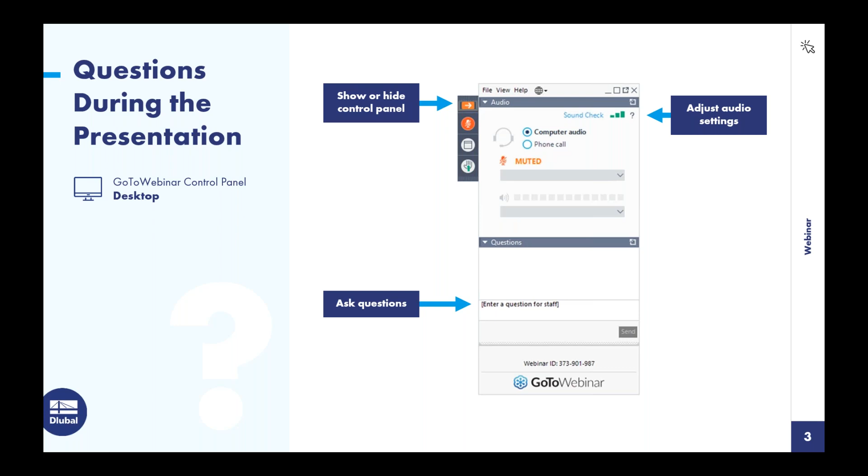So to quickly go over the content that we'll cover over the next hour today, I do want to give a brief introduction to the RFEM 6 program and the available add-ons for mass timber design. We'll then move on to our first example, which will be shown over here on the right-hand side, of a CLT floor, where we'll take a look at the gravity-only analysis and design. We'll talk about the modeling and loading workflow, the design according to the CSA, including the ultimate and serviceability limit state, but recently released is also the fire limit state. And at the end of this example, we'll quickly take a look at the modal analysis to determine the natural frequencies and vibrations of our timber floor.

We'll then move on to our second example. This is going to be a CLT hybrid multi-story building. This is where we can address both lateral and gravity analysis and design. We'll take advantage of the building model add-on that will release these building specific features within RFEM, including diaphragm, shear walls, and of course we can still carry out the full design of our CLT panels according to the CSA standard.

So for those of you not familiar with our program, RFEM 6 is the base software. So this allows us to fully model our structure. All of the materials, the cross sections from the available standards are included in the base program, not only for Canada, the United States, but also other international standards. We can fully load the structure and we can get an analysis, so internal forces, deflections, and so on.

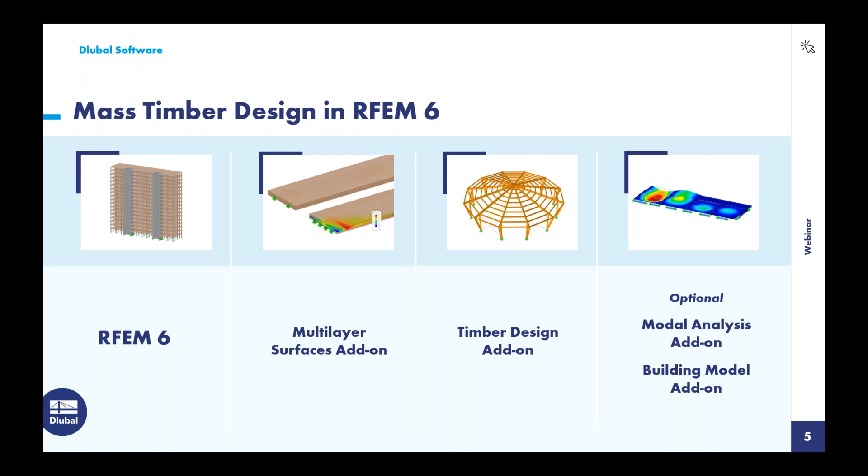So we'll begin in RFEM today. When you begin a new model, the base data dialog box would be available to us. So we would give it a model name. Now for my timber floor, we could technically model this in a 2D environment since we're looking at gravity only, but I will keep this in a 3D environment. Under the second tab for the add-ons, these are the available add-ons within RFEM that you have purchased for your license. And for today's example, we're going to activate here the multi-layer surfaces as well as the timber design add-on.

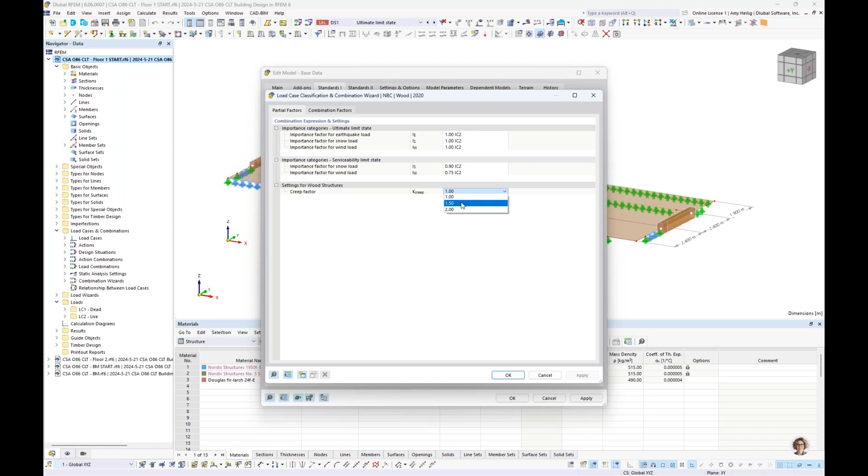And finally, under this third tab, this is where we set our standards. So you'll notice that within this dropdown, I do have the NBC selected that is specific to wood. Now, this is identical to the NBC load combination generator above it. The difference here is that when we activate the timber design add-on, we have the ability to account for the creep factor. I'll show this to you later on in the serviceability load combinations, how we can account for that, but the NBC wood is required when we activate the timber design add-on specifically.

We will carry out the design of the CLT panels according to the CSA O86 2019, but notice we also have the NDS, Eurocode, and other international standards available. I will be working in metric units today, but we can always change this to imperial units. If we access the unit settings here, we can either toggle between metric or imperial.

So I already have the timber floor modeled, but let us run through the workflow that we would typically go through when we are modeling a new CLT panel. So we would start by drawing a 2D surface element. So this would be available up here in our toolbar.

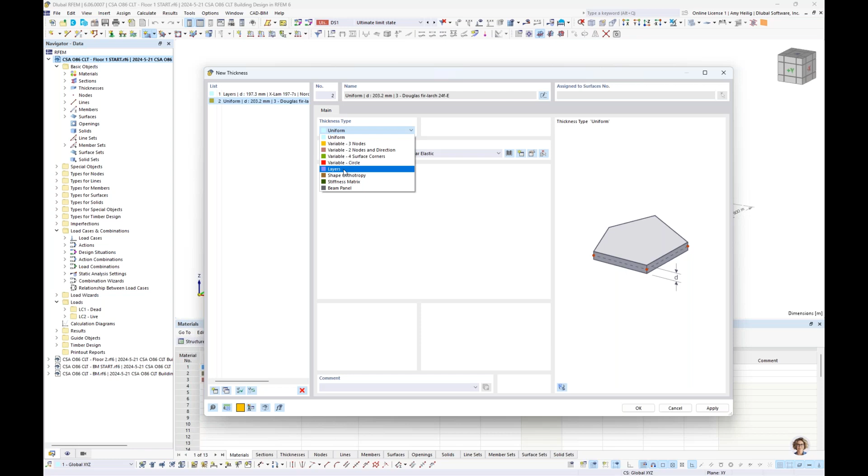And the program is asking us to initially define a thickness. So if I go into my thickness definitions, we would create a new definition type here. You'll notice that the thickness type can be set to layers. So this option is only available because we have activated the multi-layer surfaces add-on. Without this add-on active, we would not see this option available to us.

So under the second tab, this allows me to individually create my layers for my custom CLT layup. To begin, we would want to define here a new material. So we can access our material database with the button up here in the upper right-hand corner. And using our filters on the left, we can filter to Canada, to timber, and then the CSA O86-19. So here are all of the relevant materials with the sub-materials shown over here on the right-hand side. So once we select any arbitrary material for our example today, we click OK.

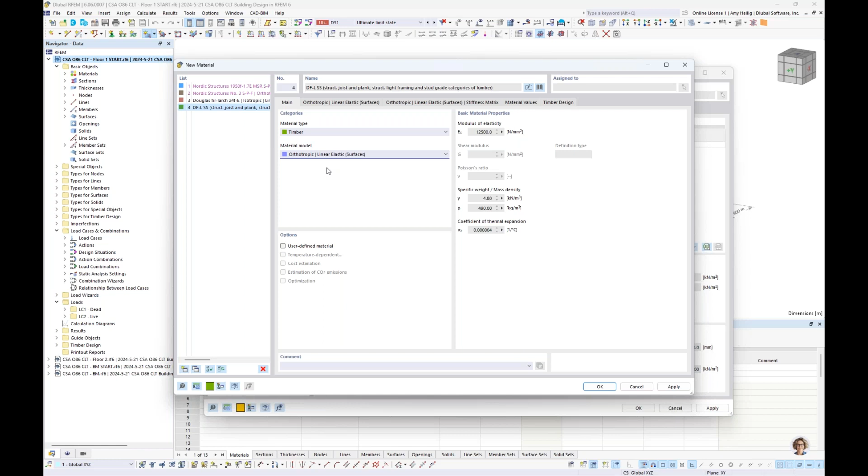Now, it would be quite common as well for CLT, of course, to change the material model to orthotropic. So this would be required because we're using this material for 2D surfaces. Therefore, we need two different strengths in two different directions. So we'll go ahead and toggle that to the orthotropic linear elastic. Now, we would also want to activate here user-defined material. And the reason why is it's also quite common with CLT that we would set the modulus of elasticity in the weak axis direction to 0.

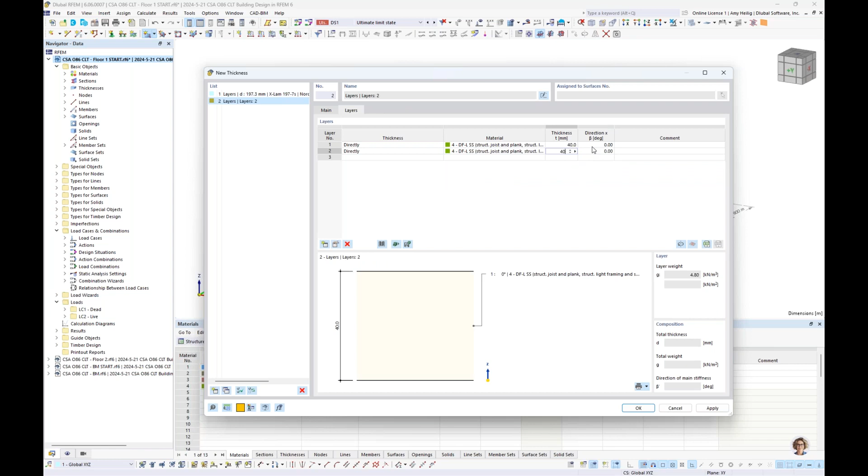So once we have input this information for the material, it will be brought in to the thickness dialog box where we can set the thickness of our first layer to something like 40 millimeters. And the orientation is set to 0 degrees. This is based on the local x-axis of the surface element itself. Now, the second layer, we can just choose this same material. We can set the same thickness. The orientation, though, would be set to 90 degrees. And then for our third layer, we will just use this same material, again, 40 millimeters. And here we have a custom 3-layer CLT layup.

Now, this is the entire concept here of CLT, to ensure that these layers are oriented 90 degrees from the layer above or below it. We can save this to our library so that we can pull open this layup definition for any future RFEM models. Now, alternatively, if we want to take advantage of our manufacturer library, we can do so.

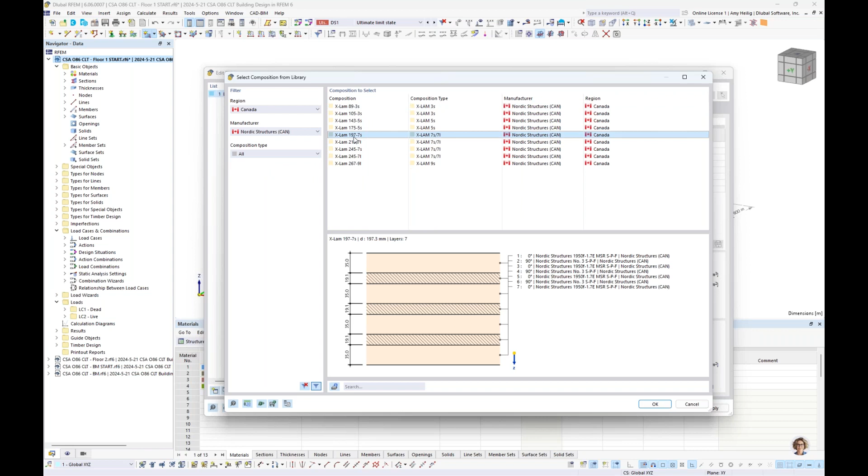So you'll notice here under the import layers from library, and to clear the filters of the regions, we have all of the manufacturers from North America and from Europe implemented directly within RFEM. Filtering to the region of Canada, we have a few manufacturers here, including KLH, Kalesnikoff, and Nordic Structures. So for example, today we'll take advantage of Nordic Structures and we will choose a 7-ply layup. When I click OK, you'll notice that all of these layers are automatically brought in with the relevant thickness and orientation. And this is just information that we were given directly from the manufacturer. So quick access here if you do plan on using one of their products.

Under the third tab, stiffness reduction. So this is a really important topic when it comes to our CLT panels. You'll notice that the K33 reduction factor here is for the torsional stiffness. We also have the K88, which is the in-plane stiffness reduction factor. And these values were already given to us by the manufacturer.

Now, it's quite common for most of these CLT manufacturers to not include glue at the narrow edges here of our boards of each layer. So inevitably, the shear stresses are also not going to be transferred to those narrow sides of the board. So this is the reason why we typically would want to apply these reduction factors to our panel. Now, when we reference the CSA or the NDS, there really is no guidance on how to calculate these stiffness modification factors. So therefore, we actually refer to the EC5 and in particular the Austrian Annex, which has very clear equations on what these reduction factors should be when we do not have glue at the narrow edges.

So I'll actually turn to our website here, dlubal.com, and we have a frequently asked question. It's FAQ 4119 that discusses this topic further and exactly how to calculate the k33 and k88 reduction factor here from the EC5 standard. We also have the Excel file you can directly download from the FAQ here.

And if I pull open this Excel file, it's fairly straightforward in that we would just input some properties here of our CLT panel, and then those equations from the Austrian annex are already listed here to calculate what those reduction factors will be exactly. So again, going back to RFEM, when you are taking advantage of the manufacturer CLT products, these values have already been set and given to us from the manufacturer directly, but if you are creating a custom CLT layup, this is likely something that you're going to want to input yourself.

Now, k44 and k55, these are going to be the shear stiffness reduction factors. When we take a look at the CSA O86 or the Canadian CLT handbook for deflection calculations, these all utilize the shear analogy method to calculate the reduced bending and shear stiffness to account for shear deformation. Well, RFEM is actually utilizing what we call the laminate theory, and it's going to directly calculate the shear stiffness matrix entries D44 and D55, considering both shear and bending deformation.

So the laminate theory is certainly a more detailed and exact approach when we compare it to the analytical equations from the shear analogy method. But point being that that reduction is all taking place underneath the hood with the laminate theory calculations, so we likely are not going to adjust these factors.

Then we have our settings down here where we can activate this checkbox for design for failure of net section and failure in glued contact surface. So we might be wondering, well, what is this related to? So I'll go back to the PowerPoint here to explain this in more detail. This all has to do with the shear failure modes that we're going to present to you within the CLT design according to the CSA standard.

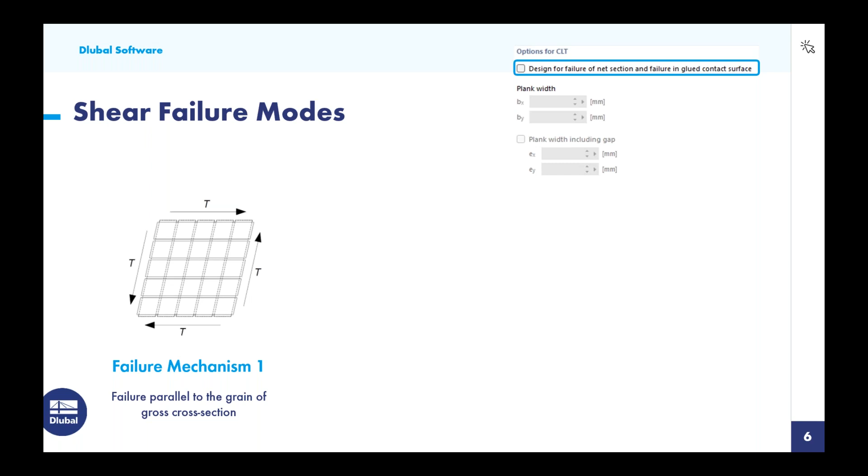Now, when we turn on this option, we're going to carry out 2 additional checks, including failure mechanism 2, which is failure perpendicular to the grain of the net cross section. This is also known in the handbook as the net shear failure. And finally, we also have failure mechanism 3. This is the failure of orthogonally crossing boards, otherwise known as torsion.

So we might apply these additional shear checks when we have a CLT panel that's acting more like a beam, or certainly for wall elements. So you'd want to refer to the handbook to decide if that's something that you would like to activate for those additional checks of the CLT panel. The plank width would also be defined when we turn on this option, as well as a plank width including any gaps if those were available. This information would be needed then to carry out these additional shear checks. For today's example, I'm going to leave this unchecked, so we should only see failure mechanism 1 in our results.

The final tab here is going to be the stiffness matrix. So this is the entire concept of these multi-layer surfaces, that we are calculating this global stiffness matrix automatically for you based on the individual layers, and we can actually view the stiffness matrix here. I'll discuss this in more detail later on when we're running our calculation.

So once this information is input, we would draw our CLT panels. And you'll notice that, again, I've taken the liberty here to model 3 panels side by side for our timber floor. Now, it's really important, in the same way that we orient members with a strong and a weak axis, that we do the exact same thing for these timber panels. So CLT panels also have a strong and a weak axis, and we want to ensure that we are modeling them correctly as well.

So under our navigator and the views tab, up at the top, we have our surfaces tree, where we can activate here the display of the layer directions. And I'll turn this into wireframe view and zoom in here. So now you'll notice that layers 1, 3, 5, and 7 for our CLT panel, which is the strong axis direction, are oriented in the lengthwise direction between supports, which is exactly what we'd like to see.

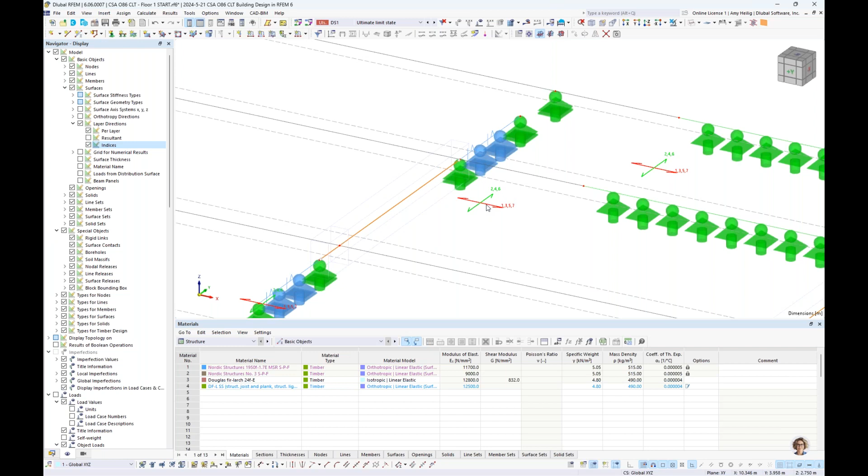And then the weak axis, so layers 2, 4, and 6 are oriented in this transverse direction. Alternatively, we can activate here only the resultant, which is going to show you the strong axis orientation only.

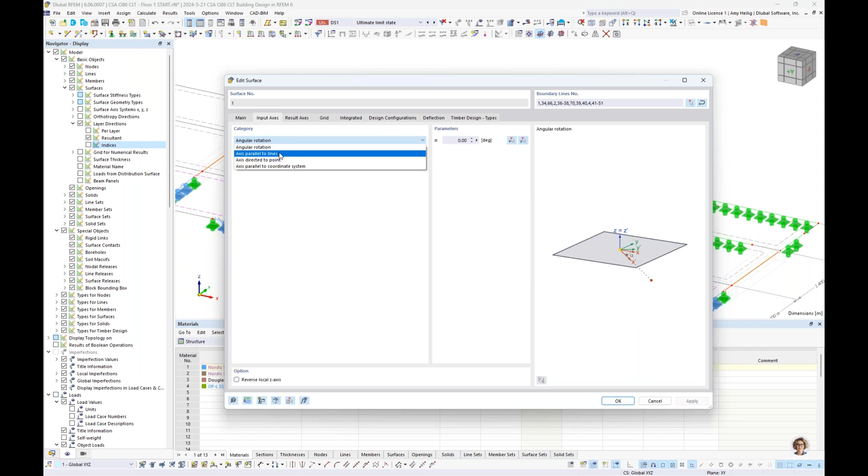If we needed to make modifications to the axis direction, we could double click on a surface or multiple surfaces, activate here specific axes, and under the second tab, we have the ability to rotate the local axes or maybe set them parallel to a line within the model or additional options here.

So I'd also like to go over the additional elements that are modeled here for my timber floor. You'll notice that we do have glulam beams that are going to span between these supports and essentially will inevitably support the CLT panels above them. Now, I did not model an eccentricity here. Everything is modeled at the center line. This is a bit more of a conservative approach with the internal forces rather than modeling this fully rigid eccentricity that may be hard to achieve in true construction methods anyway.

So taking a look at the cross-section definitions quickly, we have our first beam over here, a slightly larger section at 240 by 440 millimeters. And then the rest of the beams are going to be 160 by 320 millimeters. All of these members have a moment release applied at the member ends, as well as a torsional release applied at one end only.

Now, these were modeled as separate segments here. It is entirely possible to keep it as one continuous member, but if they are separate segments, it's really no problem in the program. We can select both of these and create what we call a member set. So that's what this very faint dotted line is around both of these segments. And member sets can be fully designed as one continuous member as well, regardless if the beam is broken up into separate segments. Now, we won't be looking at the member design today, rather our focus is only on the CLT design, but I thought that was worth mentioning.

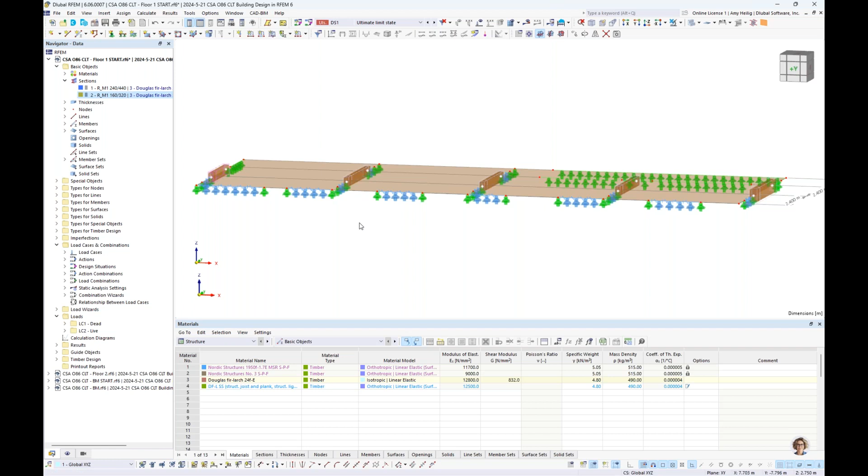You'll also see here several support conditions, and essentially this is a timber floor that is modeled at the elevation 2.75 meters in the vertical direction. So these support conditions are going to represent the columns and the wall elements that are framing up underneath it. But because we're only evaluating and analyzing the specific floor for gravity only, we're representing those by the support conditions shown. So for example, we have pin supports here and over on the right that maybe represent the column framing up into the timber floor directly for point supported CLT.

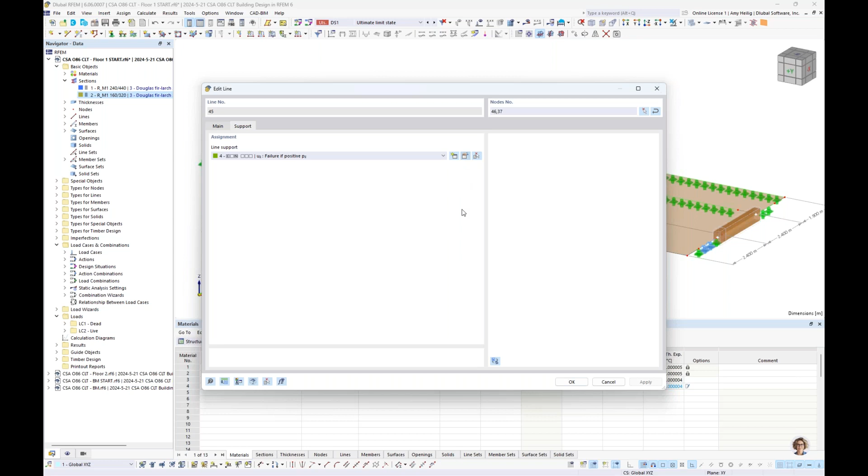Then we also have the pin line supports that are going to represent our concrete shear walls. And then you'll also notice these nonlinear line supports. So the nonlinear line supports are representing our CLT shear walls that maybe exist framing up into this timber floor. So I have set this nonlinearity here so that these two elements will release in tension. When that occurs, we also have the nodal supports modeled at each end of that CLT shear wall. This represents some type of tie or strap to take those tension forces over.

So the modeling overview is complete, but now let us talk about how everything is connecting together. And specifically, we'll start with the timber panel to panel connection here. So as it's shown as default, all of the CLT panel forces and moments are going to be fully transferred to one another. But we know that these panels will likely be connected with screws. So we would like to release something like the moment. Maybe we want to account for the slip of the screw connection.

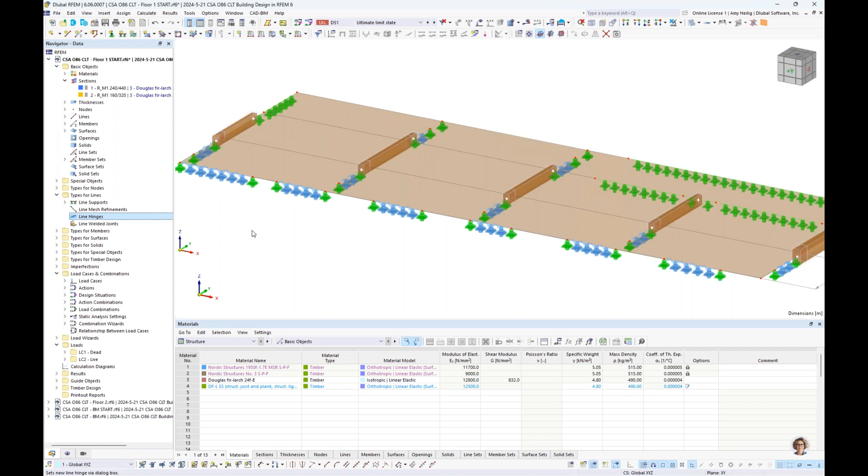Well, we do so with what's called a line hinge. And this is available over here in our navigator. Under the Types for Line folder, we can right-click here under Line Hinge to create a new definition type. And within this dialog box, we can fully release the moment between the two panels.

Now, for my example today, I'm actually going to just set this to a very small value. I get a little bit better stability once we get into the larger 3D model. So it's entirely possible to release it for most scenarios, but in others, you may need to just set a very small spring constant here.

We also can define the slip of the connection, and this is based on the local axes of the line element itself. So in this longitudinal direction, the local x-axis, we can define a spring constant here, and this would be calculated outside of RFEM just depending on the type of screw connection we have.

So using an arbitrary value here of 8,000 kilonewtons per meter squared, we can set this in both the transverse direction, but also the longitudinal direction. So we see both the X and Y axes indicated here in our image, and that's what we're setting this slip over here on the left-hand side.

Now, once we have defined this specific definition type, we would need to actually apply it to the model. So we can do so by initially clicking on our surface, and then my second click is going to be the line elements themselves that I want to apply this line hinge. So when I complete the first surface, we'll go ahead and choose the option over here to add a new object where we select surface number 2, and I'll go ahead and turn this to wireframe view.

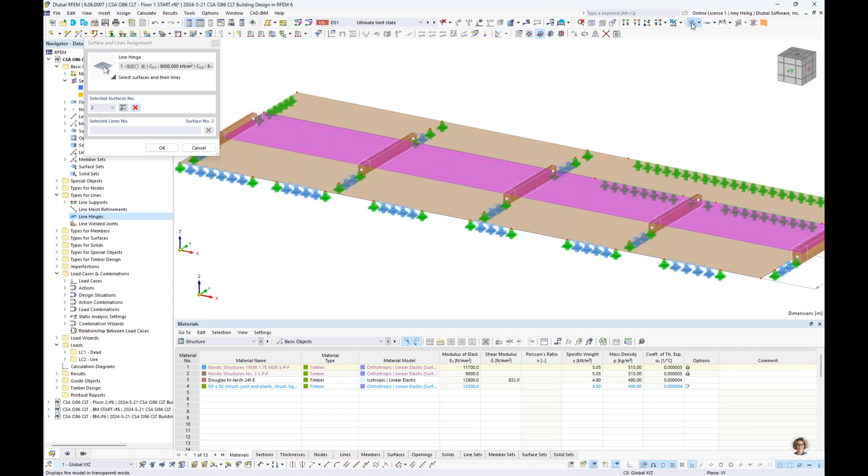And then my second click is going to be these line elements here on the right-hand side of surface number 2 to apply the line hinge. So once this is done, I click OK through these dialog boxes. And what we should see if I turn this into a rendered view is the line hinge symbol.

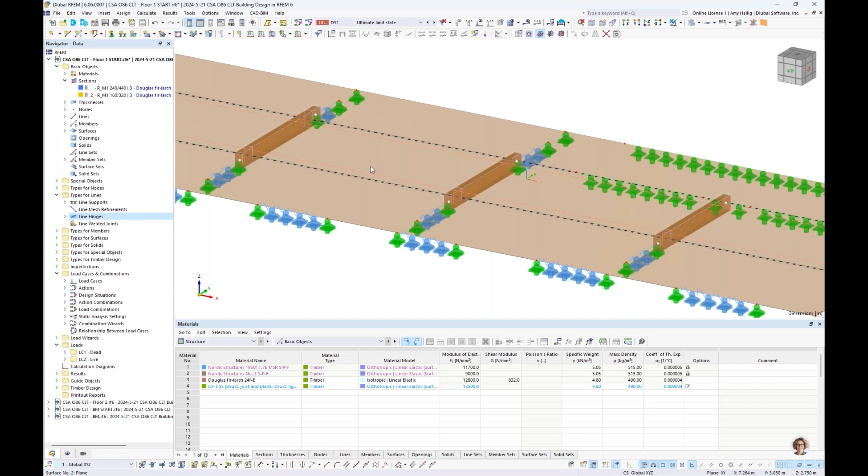You'll also notice that I did apply this to only one side of the CLT panel. We do not apply a line hinge to both sides. The reason why is that this can cause instability issues within the model itself. We need to leave at least one CLT panel fully fixed. This is the same concept for 3 CLT panels framing into the same line. We can release 2 of them, but we need to leave at least one as fully fixed.

Now, we have this same topic of conversation for how the timber members are connected to the CLT panel. Currently, everything is rigidly connected, but we want to account for likely this screw connection. So instead of a line hinge here, we're going to apply what we call a line release. And this is available under the special objects tree. We see here line releases. So panel to panel connections, we can use line hinges. Panel to member connections, we can use line releases.

We create a new definition type, and to begin, we select here the degree of freedom definition. Now, this should look very similar to line hinges in that we can release the moment or set a very small spring constant. We can also account for the slip here between the member and the CLT panel. This may be a different value, such as 5,000 kilonewtons per meter squared, just depending on our connection. And perhaps I only want to apply the slip in the longitudinal direction here along the line length.

So when I click OK, I'd like to select here my first 2 surfaces because I would like to release my beams from those initial 2 surfaces. Then I can graphically select my line elements. So I'll scroll in here to select the lines of my first beam. I'm going to purposely skip my second beam, and I'll go ahead and apply this to the additional beam line elements shown here in the rest of the model.

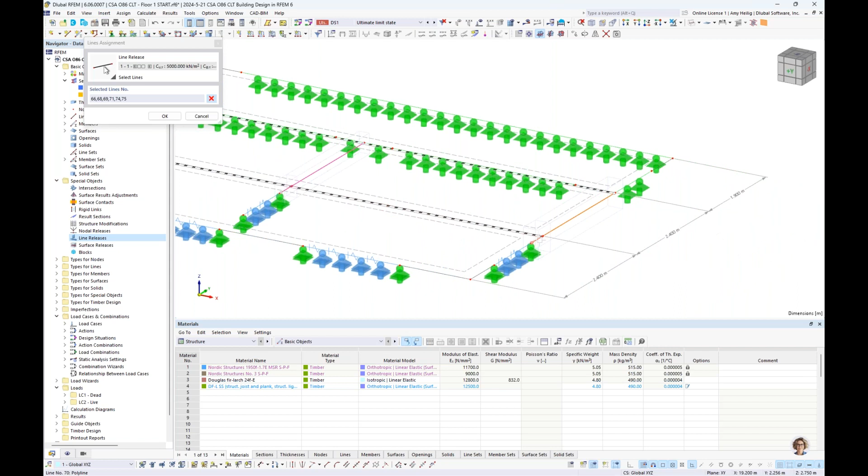So once this is complete, we click OK. The program says, hey, wait a minute. In order to correctly apply this line release, we need to apply either action 1 or action 2. We'll go ahead and apply action 1, and then we get the line release symbol shown around those members.

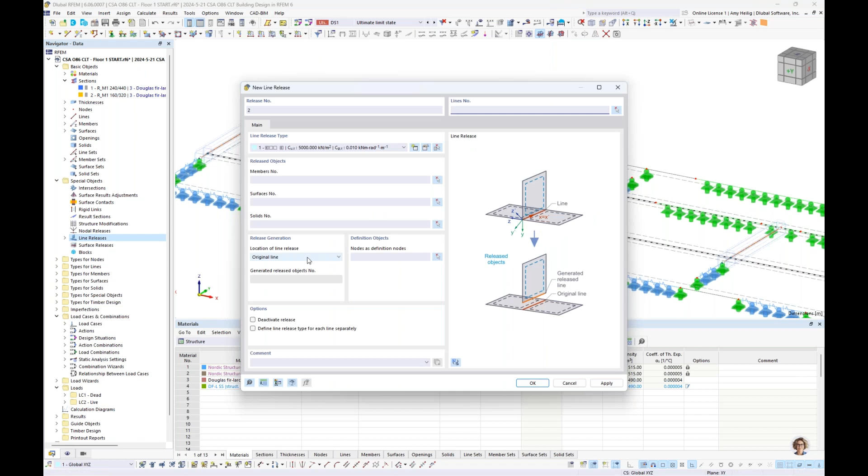Now for this second beam here, we're going to right click to create a new line release again, but this time we're going to release surfaces 1 through 3. So we're using the same definition type here, and then I can graphically select these 3 lines. And you'll notice that this is different because this beam spans across all 3 CLT panels, whereas the other beams only span across surfaces 1 and 2. So our line releases are now complete.

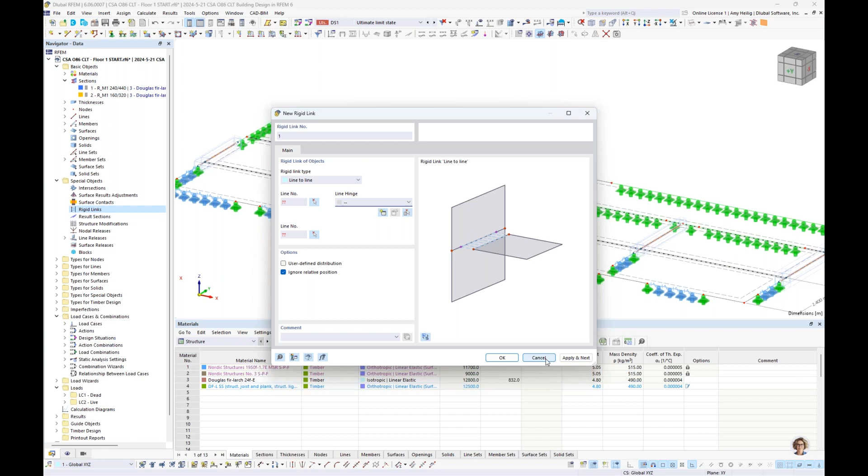I did want to also point out a new feature here under rigid links that can also take the place of this line release. So we've recently added the ability here to add in a rigid link for a line-to-line connection, so something similar to a beam to CLT panel. And you'll notice that the line hinge definition type is already available here within this dropdown. So this is an alternate method. If you prefer this over the line release, you can go ahead and take a look at that new feature as well. All right, so now the modeling is complete.

Let us review our loading. Now, for this example, we have a very simple loading scenario. So gravity loads only. We have here our dead load, which includes self-weight only, no additional loads applied. We also have a live load. So this live load is going to be 2 kilonewtons per meter squared, just basic surface loads applied to the 3 CLT panels. Now, in reality, of course, we would have much more complex loading, many more load cases, but for example, today, this will be sufficient.

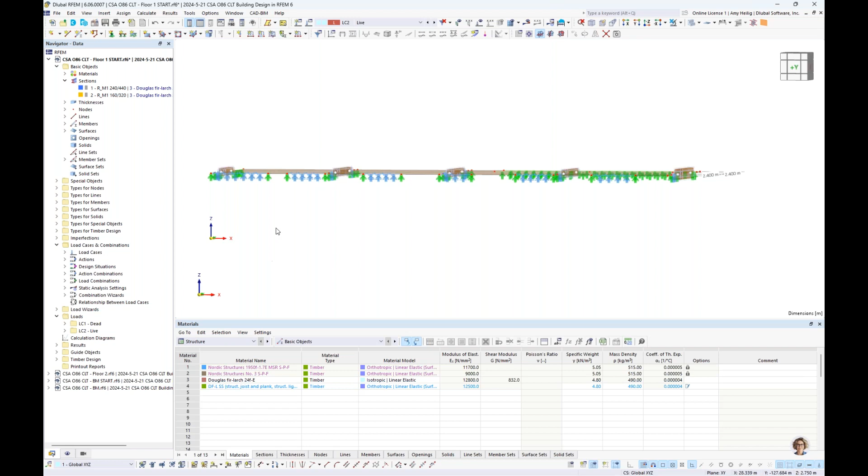For these 2 load cases and for this model in general, remember we're at an elevation of 2.75 meters in the vertical direction. We're going to assume this is part of a multi-level story structure, so we likely have additional stories above it that we need to take into consideration, since all of the loads being transferred down through these additional floors to the current floor I'm designing are not accounted for by the loads I've applied now.

I'd like to take advantage of a feature under our load wizard that allows us to import support reactions and convert them to loads within our current model.

So if I pull open a second model here, this is an identical timber floor. The only difference is that I've increased the height by an additional 2.75 meters to represent the floor above this one that we're currently designing. The same loads are applied, the dead load and the live load.

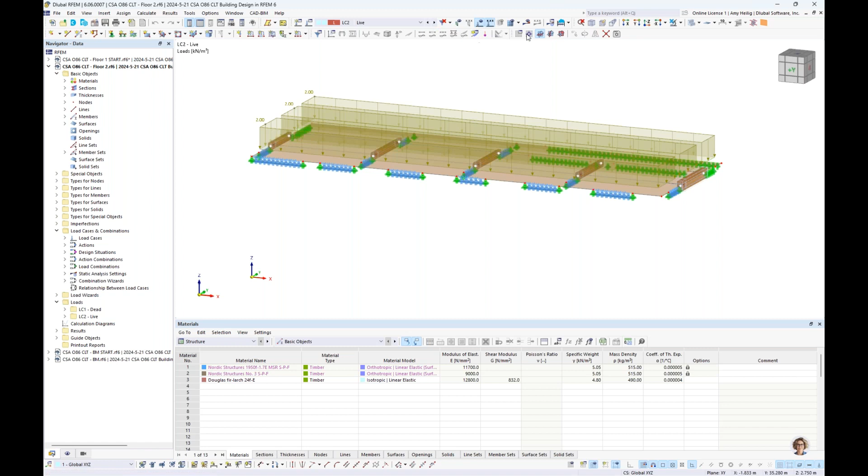Once we run the calculation, we would see support reactions at the nodal supports and also along all of these line supports. This is the information for both the dead and live load cases that I'd like to transfer into my current model and convert them to loads. So going back to our current model, we can activate the import support reactions option under the load wizards.

This option will only be available under a couple of conditions. Number one, that additional model I just opened needs to have the calculation run and the results saved to our computer. Number two, the current model as well as the model we're bringing the support reactions from must both exist under the same project folder within the Dlubal Center.

So we want to bring in the reactions from the model I just showed you, and the program has already detected the support reactions from that additional model. In order to bring in those reactions, we need to tell the program exactly where to place them on our current model.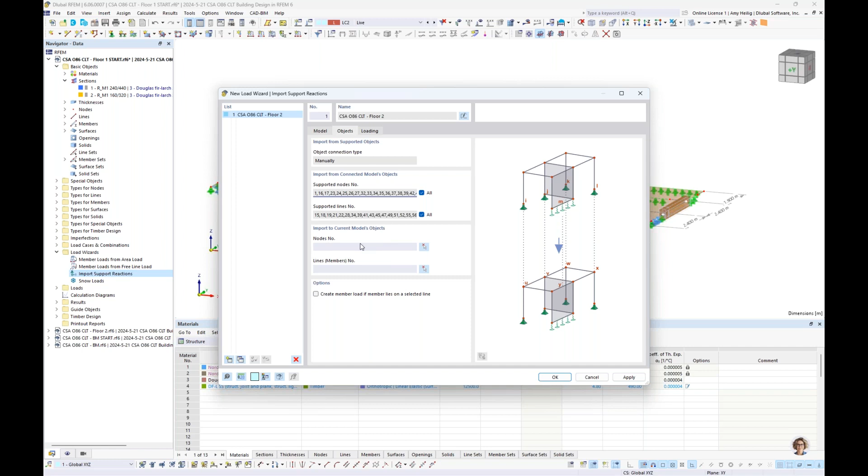We want to select all of the nodes that those support reactions should be applied to as loads. This is quite easy to do if I select my options under the project navigator - I can turn on, within graphical visibility, only the nodes that have a support applied, so everything else is hidden in the background. This way I can highlight all of my nodes, making sure we've selected all of them. You'll see them highlighted in pink, along with the node numbers given in this dialog box.

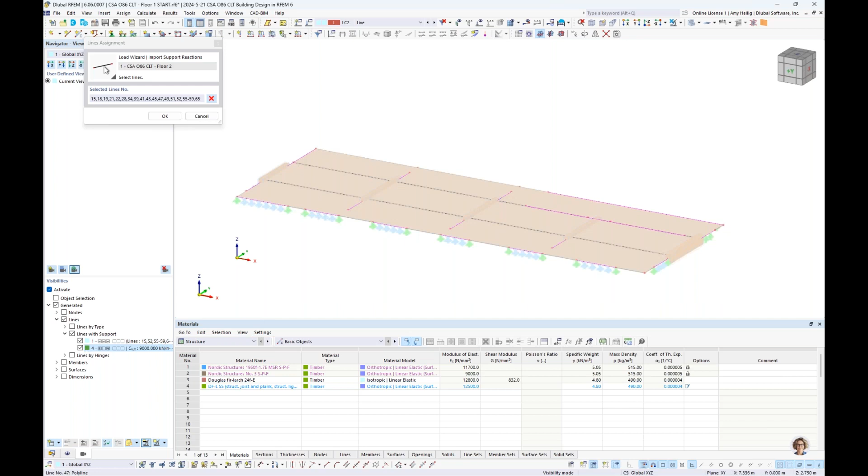Now we want to do the exact same thing with our line elements that currently have supports. I'll turn off the nodes and instead activate the lines that currently have a support applied, whether linear or nonlinear, and select all of these line elements - you'll notice everything is highlighted in pink. Basically we need a 1-to-1 ratio of how to bring in those reactions and which nodes and lines to apply them as loads within our current model.

Under the third tab, we can tell the program whether we want these line loads to be uniform, smoothed out, or varying - we'll go ahead and leave these as varying. We're going to take the loads from load case number 1 of the model I just showed you, in the global Z vertical direction, and transfer them to load case 1 in the current model, so dead load to dead load. We also want to transfer the live load from the additional model in the global Z direction to the live load in my current model.

Once all this information is set, we can click OK, and we get an arbitrary view of the loading. I'll turn off the surface loads so we can see this better. When we run a quick calculation, all of these reactions will be brought in here in the background - if I drag this down, we see this generated in the background. We'll let this move through the quick calculation of the live load only.

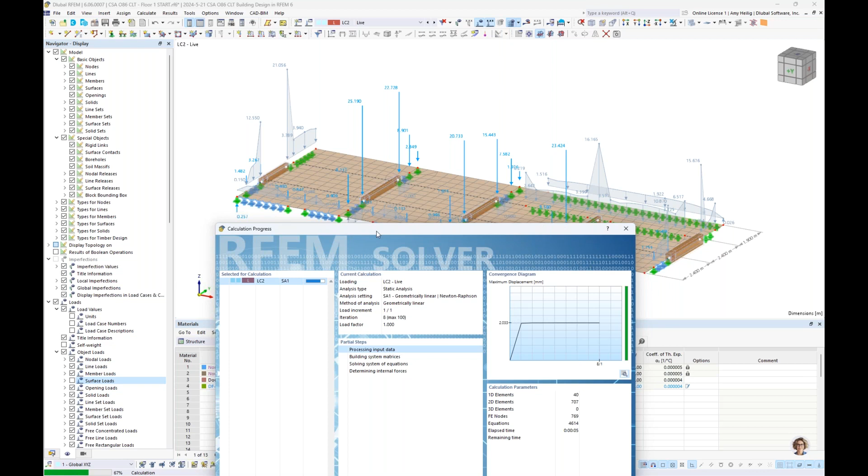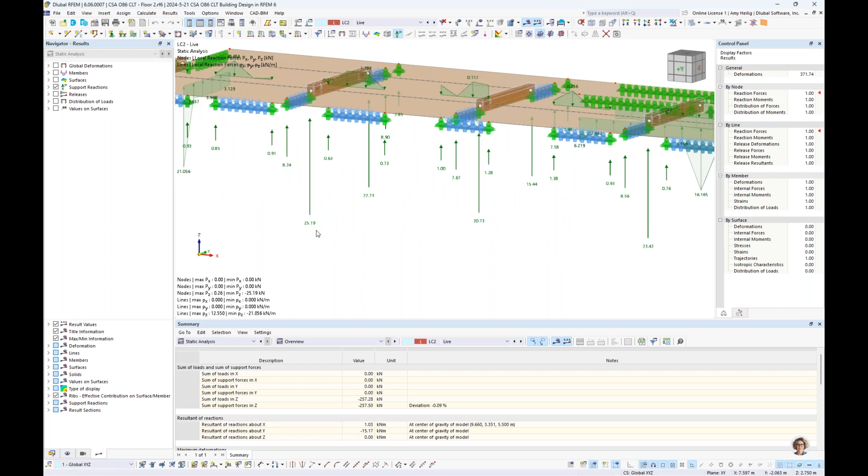Before we go through our results, let's compare these reactions to the forces. Here we have downward forces from the model above it, around 25 and 22 kilonewtons for these two nodal loads. If we jump back to our previous model, floor number 2 sitting above it, and take a look at the live load, sure enough, here are those reaction forces around 25 and 22 kilonewtons. This can be a really useful feature if we're trying to project these loads down to additional levels.

That covers the loading considerations. Let's go into the load cases and combinations to talk about design situations and the load combinations in general. Remember, we are generating these according to the NBC because we want to take advantage of this creep factor. If you want to set this to a value other than 1.0, you can do so here. This is a new feature in RFEM 6 that we didn't previously have in RFEM 5.

Under the design situations, the program will generate 2 design situations by default: the ultimate or factored load combinations from the NBC, as well as our serviceability or unfactored load combinations. If we click this info button, we see how that creep factor is directly integrated into the serviceability load combinations. I'm also going to create a third design situation that's not created by default, and I'm going to select the fire option from the dropdown. There are separate load combinations from the NBC used in the event of fire design. This is a new feature we added for CLT design, so it's really powerful what we can do. If we want to take advantage of that, we can create this third design situation here.

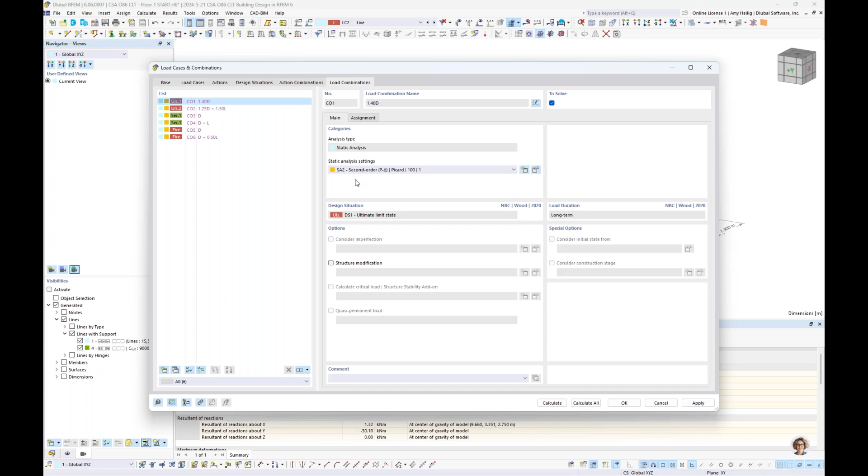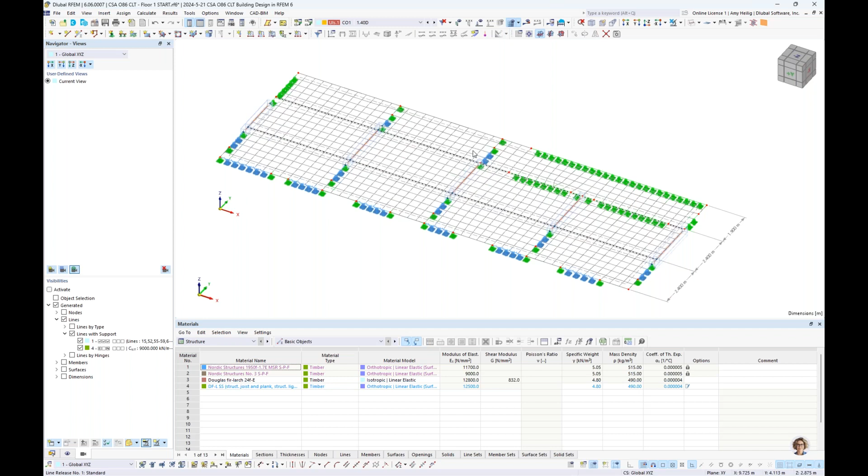Before we run the analysis portion, one more thing we'd want to check is under calculate mesh settings, we can adjust our global mesh to something slightly more refined, such as 0.4. We can regenerate the mesh and take a look at it. Keep in mind that mesh refinements are possible for any of these lines or nodes or individual surfaces as well, but everything will be meshed automatically according to the global mesh otherwise.

We can technically carry out the analysis, but the big advantage of RFEM 6 is to work through both the analysis and the design as one continuous workflow.

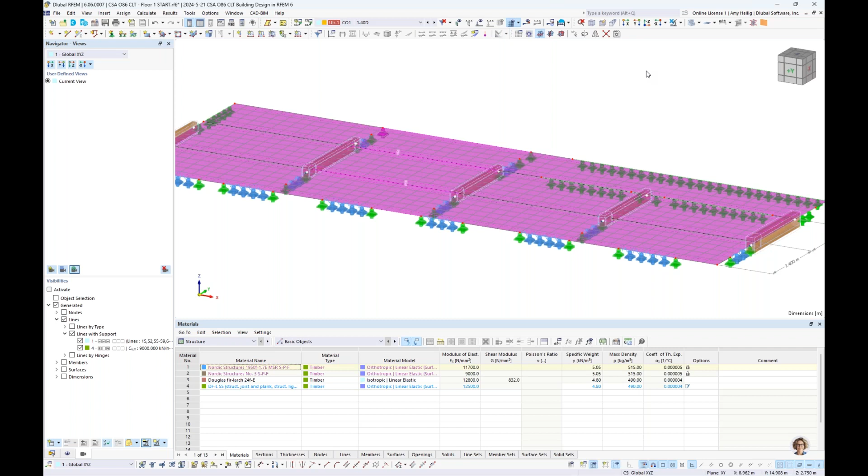I'd like to talk about the design input specific to the CSA standard for our CLT panels. If we double click on these three different panels, you'll notice that the design properties is automatically activated down here. This is telling the program that not only do we want to carry out the analysis with these CLT panels, but we'd like to also carry out the design according to the CSA within the timber design add-on. If we uncheck this, we see multiple tabs disappear, telling the program we don't plan to carry out the design.

Looking at the design configuration, under the ultimate configuration we have a default setting, and we'll jump immediately to our surfaces. You can see we have a new conservatism factor added here within RFEM 6, specific to the CSA. When we refer to either the Canadian CLT handbook or the CSA O86, there is a strength modification factor set at 0.85, and this should be applied in the bending strength strong axis direction. Again, something we didn't have in RFEM 5 that is now included here in RFEM 6.

Taking a look at the serviceability configuration, again for our surfaces, this is where we set the limiting deflection ratios for either surfaces that are supported at both ends or if we have a cantilever CLT panel.

And finally, our new fire resistance configuration. If we go into the detail settings for this, notice we can carry out fire design for members, but focusing here on surfaces, we would want to input the required time of fire resistance. So using our drop down, maybe we modify this to 45 minutes.

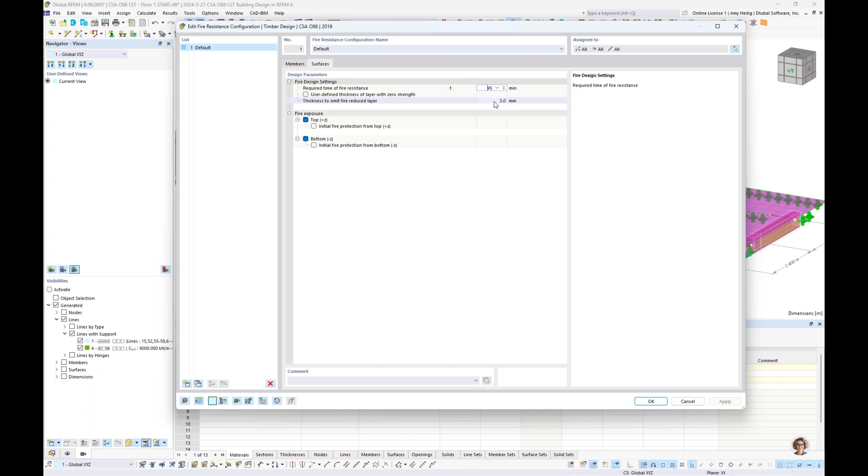Now you'll see here a value of 3 millimeters. So if the fire causes the CLT layer to be reduced to anything less than 3 millimeters, it's completely omitted from the calculation. We can also override this if possible. So if the fire does char completely any of these layers, the true cross-section reduction and reduced stiffness is going to be used within the analysis.

It's really important to understand that we're not going to use the same internal forces from the ultimate or serviceability configurations, but rather we will determine which layers are fully charred or partially charred, rerun the calculation with this new stiffness. So really powerful what we are doing with the fire design.

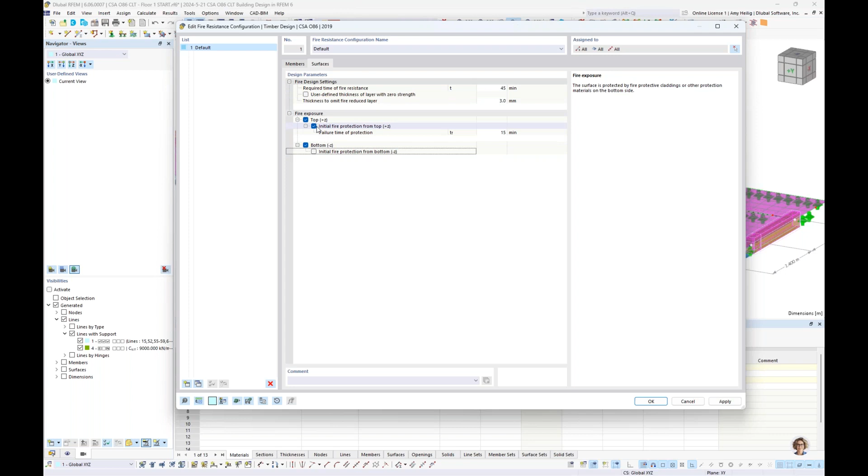If we have any fire protection at the top or bottom of the surface, we could activate that here within the configurations as well. Under the deflection tab, is this panel supported at both ends or is it a cantilever?

And then also for our reference length - what do we want to use for our length with those limiting deflection ratios? We can use the maximum boundary line of the surface, the minimum boundary line, or we can manually set this.

So in my case today, maybe I want to take advantage of my measure tool, where I can simply measure the distance between my nodal supports, for example. So 4.8 meters. I'd like to use that for my deflection criteria rather than maybe the full length of the panel, as that would be very conservative.

And finally, we have our timber design types here, the service conditions. We do have a default setting here. So for our panels, as well as our members, if we were designing them, are they dry? Are they wet? Are they treated? This all just affects the adjustment factors as well as the capacities or the strengths of our elements as well.

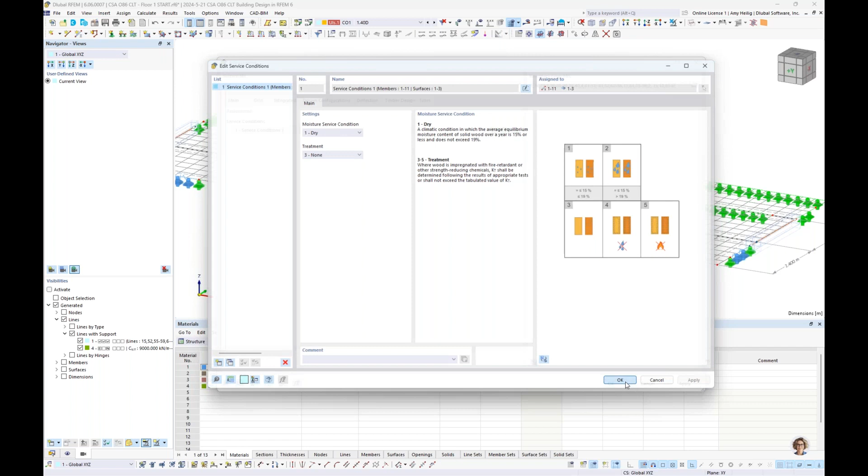So now that the configurations have been applied to this structure, we'll go ahead and turn off our mesh here and turn this back into a rendered view.

Under the timber design add-on within the table, this is our input data. So we'll see here again those three design situations, ultimate, serviceability, and fire, that we just simply need to tell the program which limit state checks to apply according to the CSA standard.

So ultimate to ultimate limit state, serviceability, I'm going to toggle this down here in my drop down to the total load to check my deflections, and of course our fire design situation will be set to the limit state of fire.

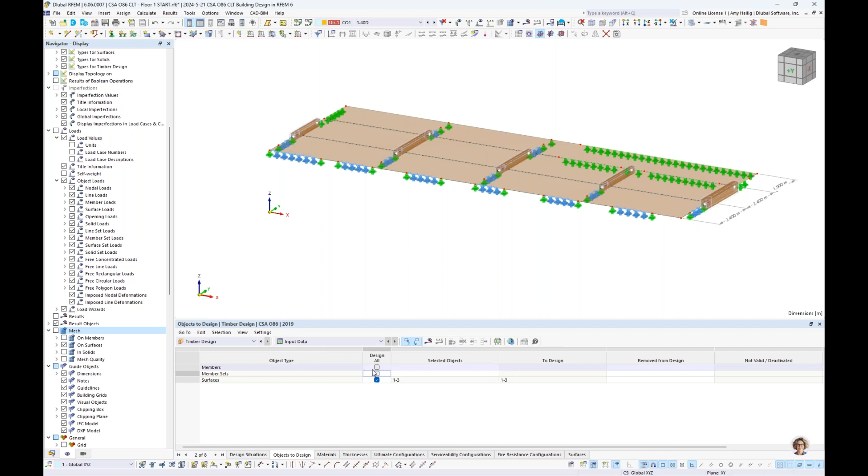Under the objects to design, currently everything's selected. We're not going to design our members here, but we will go ahead and design these three surfaces. So we're now ready to carry out the calculation.

Now this does solve quite quickly, but it's worthwhile here to jump back to the PowerPoint just to explain in a bit more detail what this multi-layer surfaces add-on is doing specific to CLT design.

So if you remember when we created our CLT layup, we had input each individual layer, and this is true even for the CLT manufacturers that are brought in, and each individual layer has its own stiffness properties, modulus of elasticity, shear modulus, and therefore each layer has its own stiffness matrix.

So utilizing this add-on in the laminate theory, the program is actually going to calculate the overall stiffness matrix of the panel for us. This is the really powerful part of RFEM, that you as a user aren't having to go in here and manually determine what the stiffness matrix is for each panel, but we're going to do this for you.

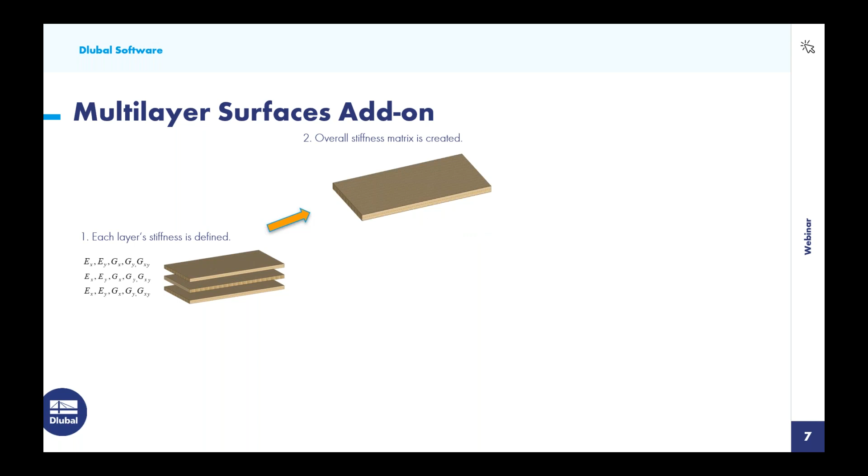And from these internal forces within the surfaces, through a series of equations, we're going to determine the stresses. And we're further going to take those stresses and distribute them back to each individual layer of our CLT panel. So when we look at something like a 5-ply layup, we might see the stress distribution look something similar to this.

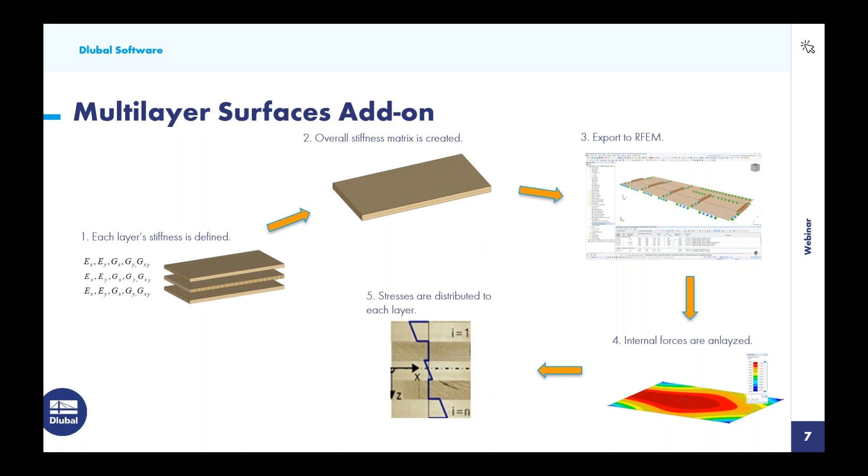And these stresses are what we are going to compare to the CSA design equations to ultimately get a design ratio on the CLT panel. So going back to RFEM here, our calculation should be finished, and you'll notice that we are seeing our design results here in the timber design add-on.

We can view the design ratios for each surface. So looking at surface number 1 that's closest to us, we see a series of design checks for ultimate limit state, fire design, as well as serviceability. So sure enough, if you remember back to the PowerPoint, we see that shear check failure mechanism 1 here.

Another common question is, do we check rolling shear? Yes, we do check rolling shear, and in our case today, this is actually the controlling design ratio. This would be shear in the YZ plane. So we can activate what we call the design check details. That is going to show us line by line here exactly how this design ratio for rolling shear was calculated.

We can see over on the left all of the adjustment factors that were considered and the values along with code references. The other helpful advantage here is called the diagram in surface point. So currently this is a cross-section view of the design ratio of the 7-ply layup, but we can use our drop down to check the stresses as well.

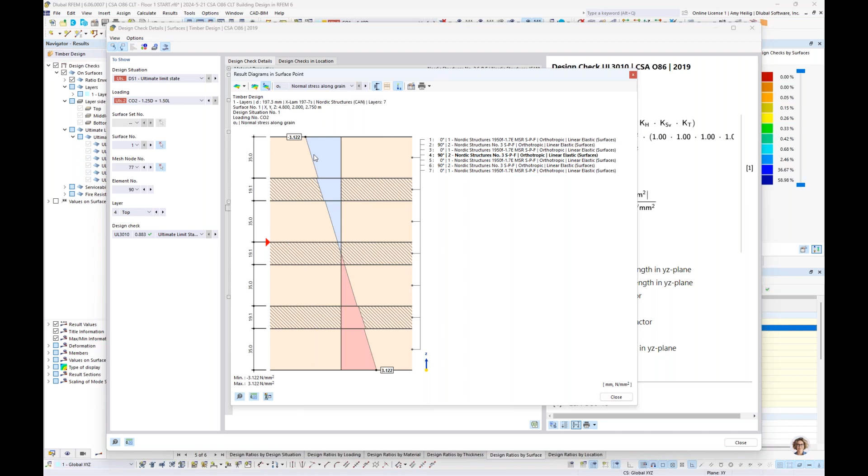So if we're interested again in those rolling shear stresses, as we would expect, we see those highest stresses here in these center layers. We can also take a look at the normal stresses or the bending stresses here and see how they look, again, referencing the cross-section of our 7-ply layup.

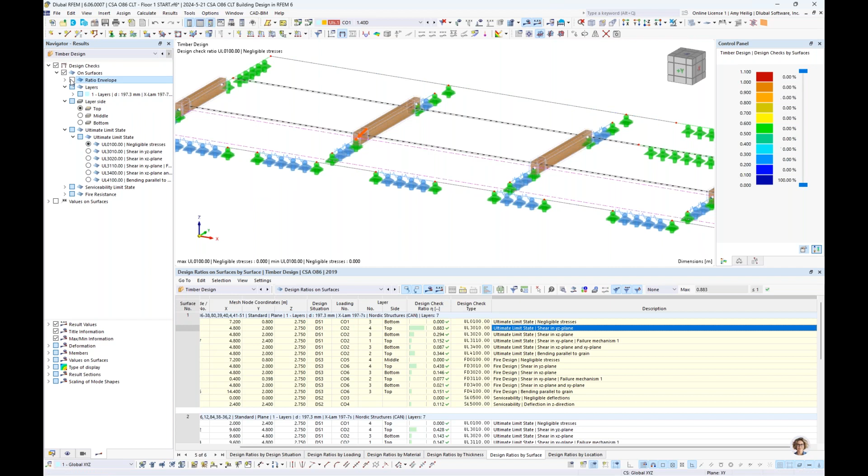So once we have taken a look at the rolling shear in table format, design check details, everything's available graphically here as well. So currently we're looking at a ratio envelope of all design checks, but we can activate the rolling shear check 3010, but keep in mind too that we need to specify the relevant layer that we're looking at. So we're most interested in rolling shear in layer number 4. So if we activate that, then we're going to see our results shown graphically here.

Moving on to fire design, and also keeping in line with those rolling shear checks, we can take a look at the design check details here. So really the same concept, but something really important to note here is the charring depth. So we can actually see which layers are completely omitted because they are fully charred from the fire conditions that we have set. We can also see which layers, in this case, layers number 2 and number 6, that are going to be reduced due to the fire.

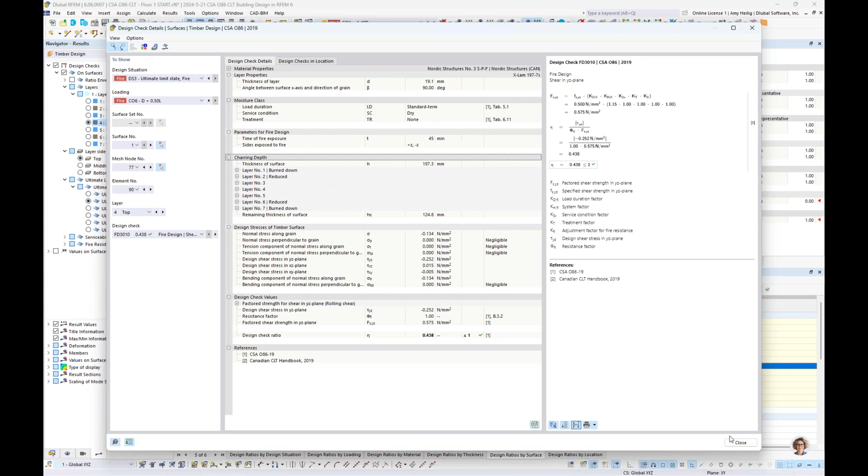So once we determine this information, again, we've lost layers number 1 and 7, and then 2 and 6 are reduced. We are going to export out that stiffness back to RFEM with the reduced cross-section dimensions as well, and we rerun the calculation to get the new internal forces with that reduced cross-section. So again, something that's really powerful going on here with those fire design checks.

So now that we have covered the basic timber design, let us back up also to the analysis. If we drop down to one of these load combinations here, and under my navigator, I can actually toggle back to the static analysis. So currently we're looking at the global deformation here of our CLT panels under these gravity loads, but we can also access the surface results.

And maybe we're interested here in viewing the stresses, and we'll take a look at the normal stresses in the positive direction here. So we want to also align the stresses with which layer we're viewing of the CLT panel. So we also see that option here within our navigator. So for positive stresses, we probably want to activate layer number 1. When we activate the negative normal stresses, we likely want to activate layer number 7.

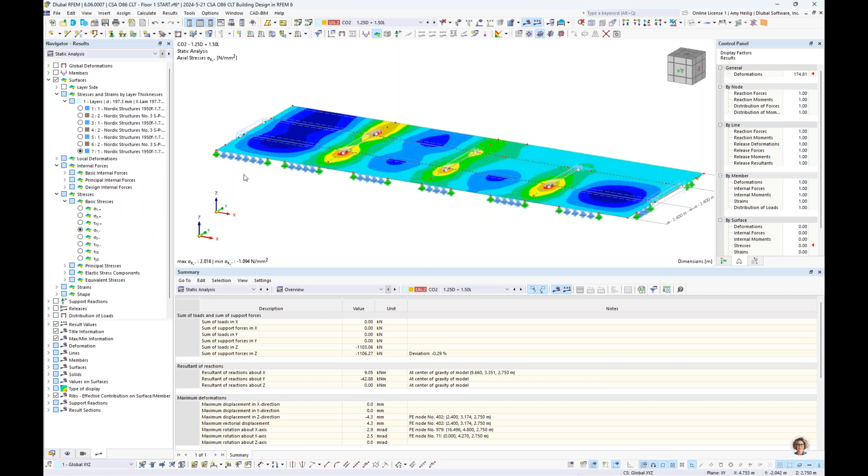When we're taking a look at shear stresses, we probably want to activate one of those internal layers, such as layer number 4. So you can see how these stresses go hand in hand with the relevant layers that we can toggle back and forth between.

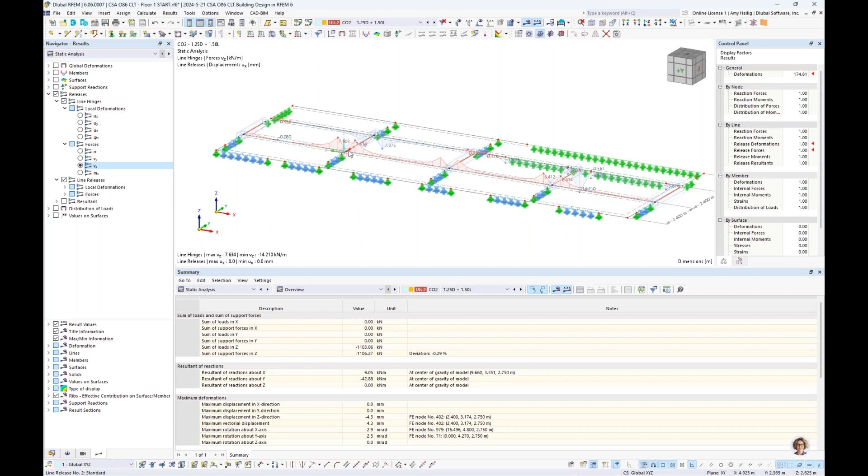The final thing to mention here that relates to the analysis is the releases option. So if you remember, we have these line hinges and these line releases. It's possible to view the internal forces of these elements as well. So for example, our line hinges, our panel-to-panel connections, we only have gravity loads in this case, so we can view the shear forces in the vertical direction between these two panels.

So we're currently viewing them graphically, but we also can right-click here on the line hinge itself to view what we call the results diagram. And I'll go ahead and empty out all of these diagrams, and we scroll all the way to the bottom here where we can activate that same information that I was just graphically viewing.

So this would probably be the forces that we would want to design our connection to. So again, that's nice that that's available both graphically as well as in that result diagram.

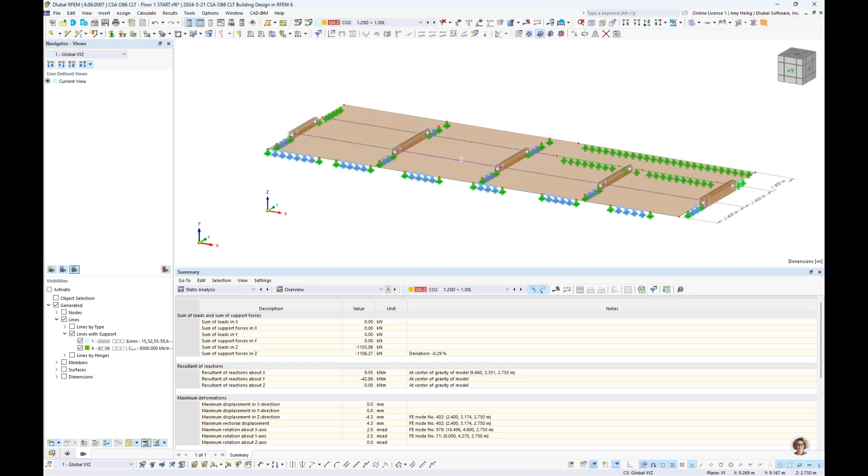The other quick thing that I just want to mention is a general modal analysis. So I'm going to go through this again rather quickly, but we do have additional webinars like the NBC response spectrum analysis. It's going to go into much more detail on something like the modal analysis. But point being, I just want to show you today how to quickly run this to determine the natural frequencies

of this timber floor. So if we go back to the base data, this is the same dialog box that we had at the beginning of this example. We can activate here the modal analysis add-on. Under these standards, we would want to select here as well the NBC 2020.

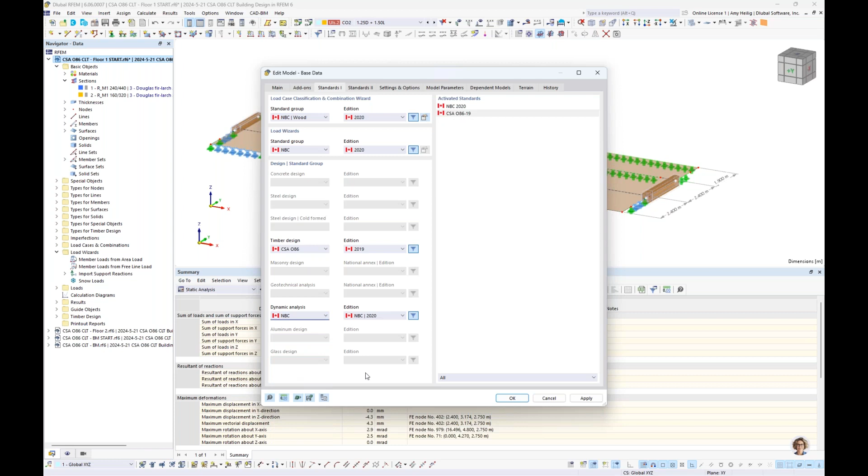We click OK. And now under our load cases and combinations, I'm going to create a third load case here that's going to be our modal analysis, where the analysis type modal is selected. I do want to import in the masses for the modal analysis, considering both dead and live load. And in order to do this, we need to create what's called a mass combination.

The program can automatically do this for us if we create a new design situation for effective seismic weight. We're not going to use this in the timber design add-on. But what this allows me to do now is to automatically create this mass combination under the load combinations, considering both dead and live load.

So now going back to my modal analysis load case 3, I can import in the masses from this mass combination. Under the modal analysis settings, I'm really not interested in anything in the X and Y direction. I really just want to look at the mass matrix in the global Z direction or the vertical direction. And we can quickly run this eigenvalue analysis to take a look at the first 4 mode shapes of our

timber floor. So once this is done solving, we will see here our first 4 mode shapes that we have solved for presented to us, as well as the natural frequency. So for mode shape 1, we have a natural frequency of 11.4, mode shape 2, 12.1, and so on.

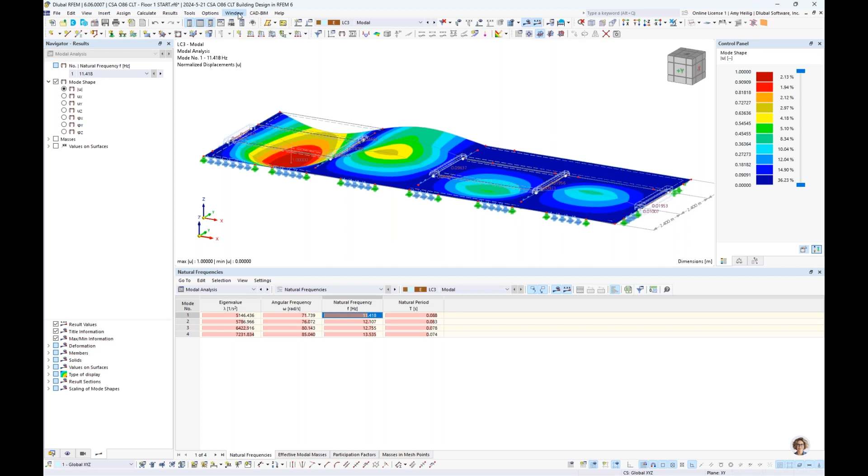Okay, so now that we have taken a look at this gravity only of this timber floor, we're going to move on to our second example today. And this is going to be a multi-level story structure here. And it might look a little bit overwhelming at first, but if we take a look at a single floor element here, and I create a visibility and I zoom in here, you'll notice that this is the exact same timber floor that we just designed.

The only difference is that rather than modeling all of our nodal supports and our line supports, I have actually modeled in the true CLT shear walls. We also have concrete shear walls and columns framing into each one of these timber floors. So again, definitely related to the previous example that we just fully worked through.

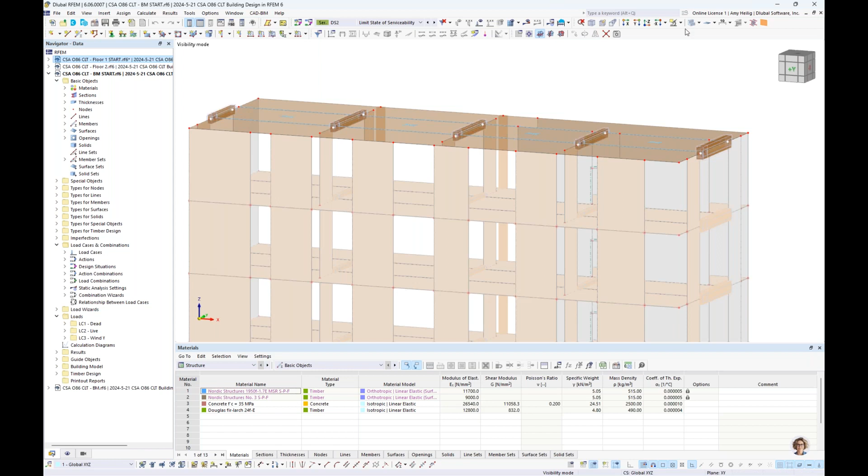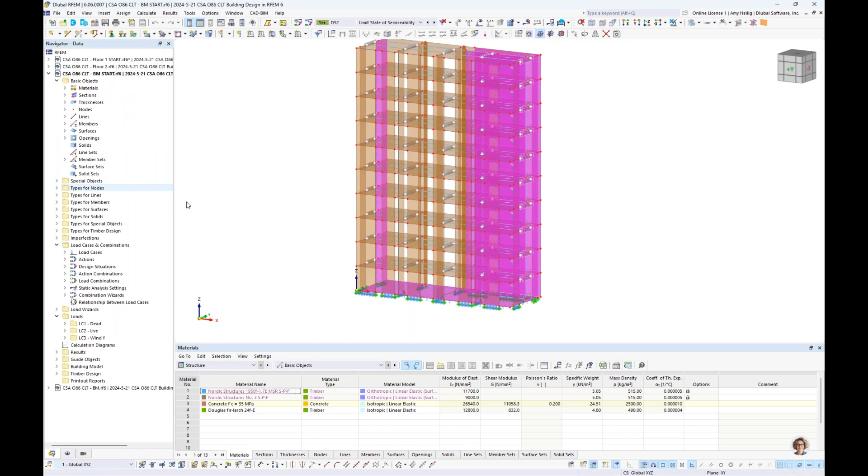So just to explain this a little bit further, you'll notice that this is a hybrid structure, as I mentioned, because we do have additional concrete shear walls. So if I activate here just to show you the concrete material, we see these concrete shear walls, concrete core modeled, as well as our foundation slab down here at the bottom. So it is possible to fully design these hybrid structures, whether it's steel, concrete, CLT, all within one program in RFEM according to the Canadian or US standards.

What else you will notice is that my lateral loads have also been applied. So we have the same dead and live load that we saw from the previous example, but we now also have a wind load applied. And this is just a simple line load, as you can see here, applied at each story level. So pretty simplistic load application for today, but again, we just want to account for that lateral load applied to the entire structure.

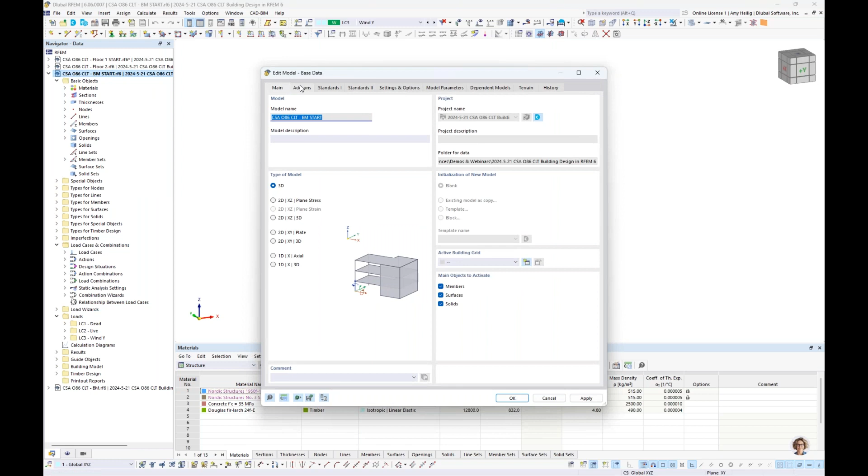So I want to begin by activating our building model add-on. And this is just going to release building specific features within this general FEA modeling. So we'll go back to the base data here that we saw in our previous example, and you'll notice that the building model is something that we can activate down here in the lower left corner. When we do so, at first glance, really not much changes with our model specifically, but over in the navigator, we now get a new folder here called building model.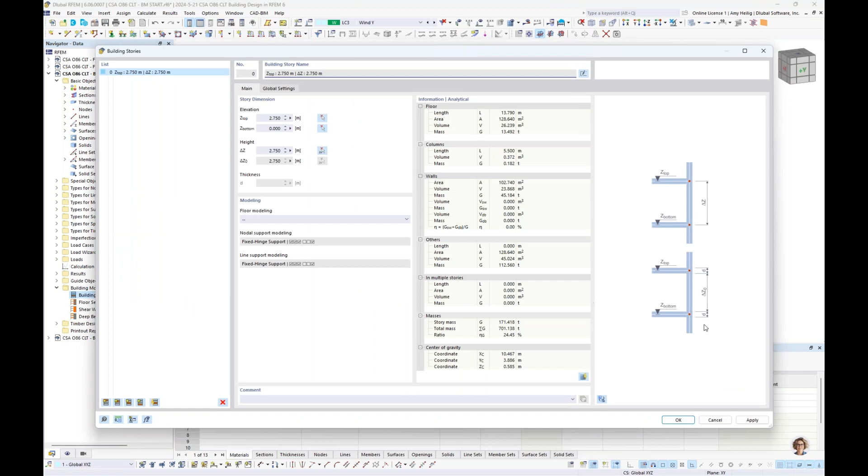And this allows me to specify the specific building stories. So I'll right click here to create a new building story. Now the program automatically suggests that I would like to create my first story at an elevation of 2.75 meters. So that's correct. We'll go ahead and leave that as is. But I'm going to continue defining the additional stories here the entire way up. So we have a total of 10 stories. Now we see a nice view here showing which elements are attached to which specific stories. It's also shown in table format as well.

For each one of these specific stories, we have the floor modeling options shown here within this dropdown. So the first option is really no input at all. So essentially, we're going to use the true stiffness properties of the CLT timber floor for both in plane and out of plane, so both gravity and lateral analysis.

Alternatively, if we decide that we meet the criteria to consider our CLT as a rigid diaphragm, we could also set that here within the building model, and that's what we're going to move forward with today. So this is going to consider infinite stiffness in the in-plane direction, but out of plane for those gravity loads, we're still going to use the stiffness properties of the CLT elements themselves.

The third option you'll notice is load transfer only. This is otherwise known as a flexible diaphragm. We will not have stiffness in the in-plane direction. We don't have stiffness in the out-of-plane direction. Rather, these surfaces will now be used to distribute loads based on the tributary area to the objects that it essentially is attached to. So those vertical walls, for example.

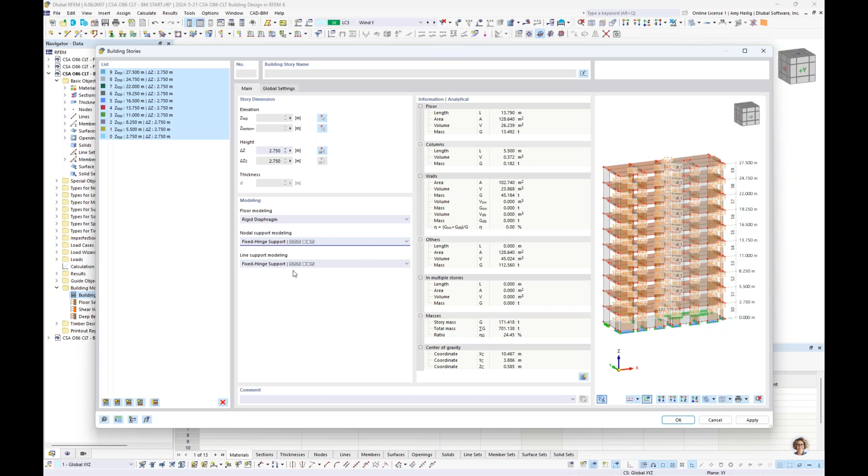Now for our rigid diaphragm today, we're just going to leave this more or less as fully fixed conditions that we see here for the relevant degrees of freedom. So once we have defined all of these stories as rigid diaphragms, we click OK. And what we will initially notice if we zoom in here is the display of that diaphragm graphically. So the center of mass is displayed here, and that rigid diaphragm is going to connect every single FE mesh point at this floor rigidly in the in-plane direction.

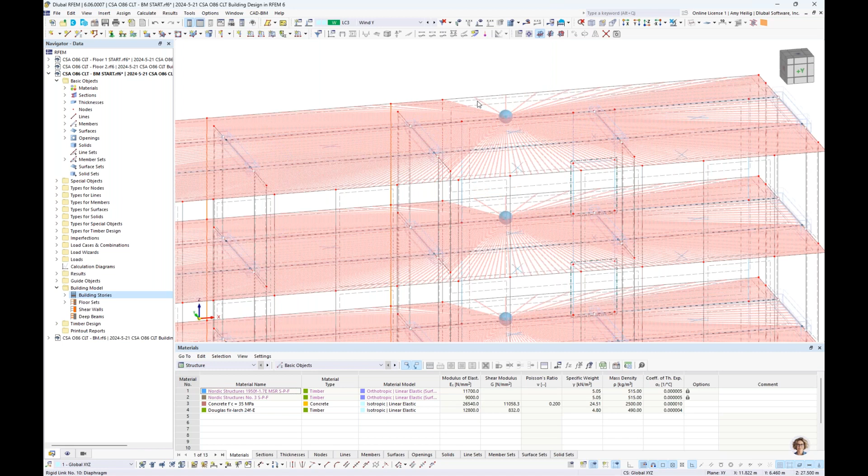And if we double click on our CLT panels that we're defining here for our timber floor, you'll notice that the stiffness type was now changed to a floor slab rigid diaphragm. Again, that's only in the in-plane direction. Out of plane, we're still going to use the true stiffness properties. If we really don't want to see this display of all of these rigid links, no problem.

Up at the top here under our navigator, under special objects, we can go ahead and deactivate them here. The final thing to do before we rerun our calculation is to define our sets of shear walls. So under the building model folder that we were previously under, you'll see the option here for shear walls. We can right click to create a new shear wall definition.

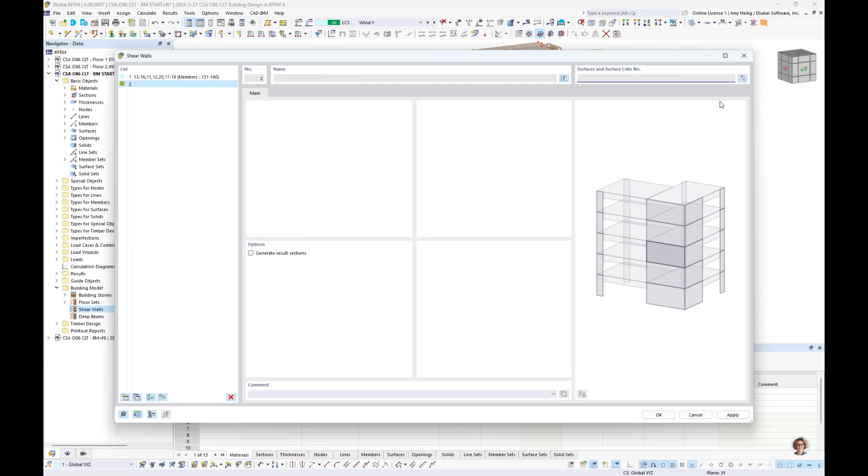And I'll begin with my series of concrete shear walls over on the left-hand side. So we just simply select them one by one all the way up the height of the building. We can also create a second set of shear walls, and these can be our CLT surfaces. So we aren't restricted to any particular material, but really any CLT, concrete, whatever it may be, can be selected

as a shear wall. What the building model will do is to simply take these 2D surfaces and sum up the internal forces and present it to us as though it was a simple member, almost like a column spanning up through these shear walls. This is going to be much more user-friendly when we're designing our shear walls so that we can immediately see what are the total shear forces in this 2D surface, what are the total in-plane bending moments, and we'll see this in just a minute with our calculation.

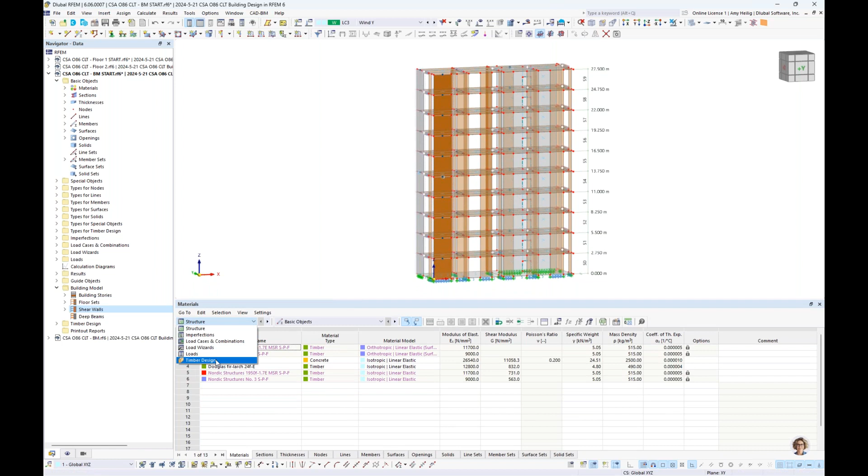Keep in mind too that once we have defined our building model specific features, back under the timber design add-on, nothing is different here from what we saw from our first example. I'm not carrying out fire design for this example, but we have the ultimate and serviceability design situations. We can select here which elements we want to design. You'll notice that currently I have the 3 surfaces for my timber floor, as well as a couple vertical walls that I'll fully take advantage of the CSA design equations for.

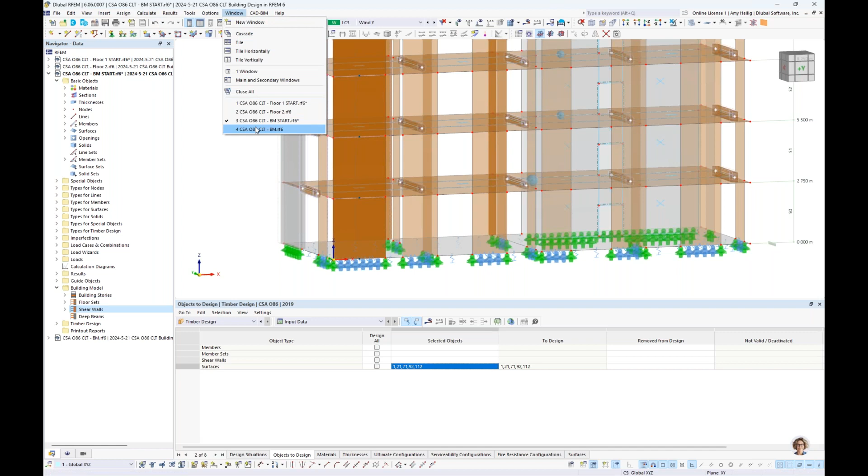So now that we have input the information, we would go to calculate all. Just for the sake of time, I will pull open an already saved model here where this calculation is now carried out. So we'll begin with the analysis results. So I jump here maybe to load combination 4 that includes dead, live, plus my wind load. And my results are available to me here. I'm currently looking at the global deformations, but you'll notice that with the building model, we now have 3 different options to toggle to.

The first is the walls only. So we're not viewing this display here of our diaphragms because these have the rigid in-plane stiffness, but rather the global deformation of those vertical wall elements only. Now, alternatively, I can toggle this to my floors. So remember, we're going to extract each individual floor into a separate submodel, and we're going to apply all of the additional loads, and mainly those gravity loads are only going to impact the design of each individual floor element.

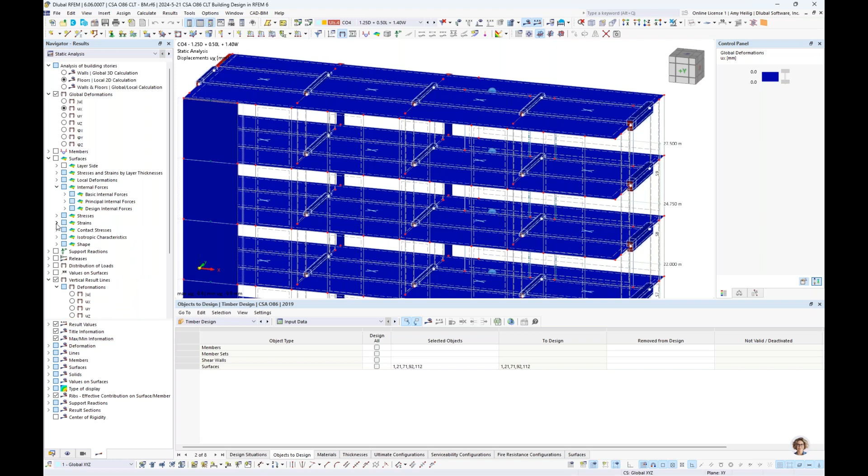So the global deformation in the vertical direction is shown here, but if I try and activate any deformation in the translational directions, we're not going to see any results. Again, because these individual timber floors are supported with those line and nodal supports, and in the translation direction, we have infinite stiffness again. If we take a look at the surface internal forces, we can activate here, not necessarily the stresses, but maybe we want to look at the bending moments of our timber floor. So sure enough, we see bending moments mx, we see bending moments my, but the minute that we activate nx or ny, again, those in-plane internal forces, we see the value of 0 here.

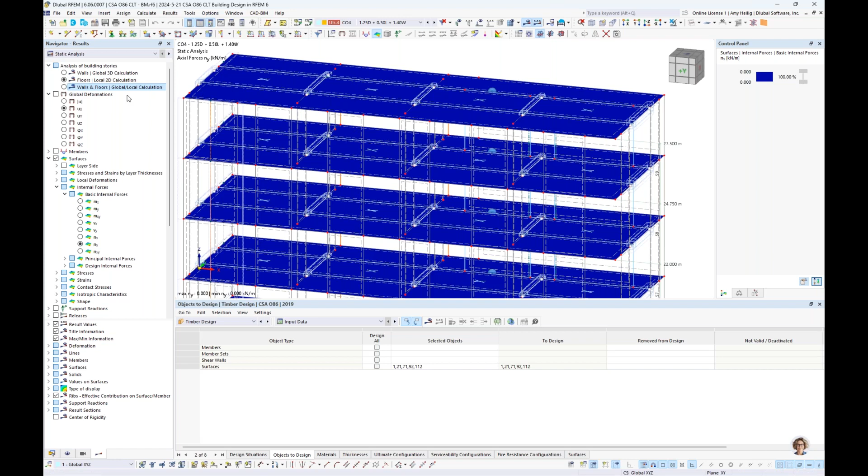The third option is just going to display the walls and floors together. So if we're interested in viewing the global deformations here, maybe internal forces, the program will more or less display the results of those two separate calculations together. Now, remember that we also carried out that shear wall calculation here. By defining those individual shear walls, the program will display this to us as standard members.

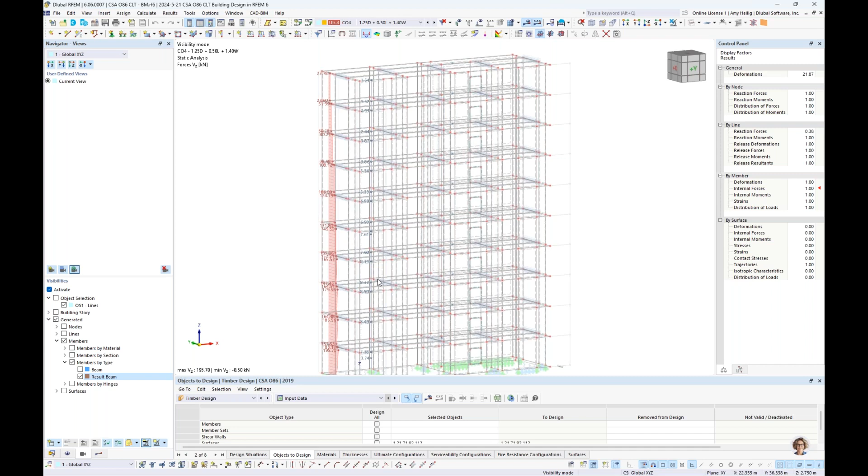So I'm going to activate here, I'll turn off the global deformations, we'll activate only the member forces. And what else I would like to display under my specific views is not necessarily all members, but members by type. Let's go ahead and turn on only the result beams. So within the result beams, these are going to be my shear wall results that, again, the program just sums up the internal forces for the entire width of each shear wall and presents this to us graphically here as a result beam. We have this same information given to us in table format as well.

So if we take a look at the static analysis with the building model, we also have the ability here to view the results by stories. And here are the member forces in the shear wall. So in table format or graphically, again, summing up the shear forces, maybe the in-plane bending moments. So this is going to be much more user-friendly than trying to determine what are the total forces across this 2D surface element. We also can take a look at the additional tabs here given to us by the building model, such as the story shear.

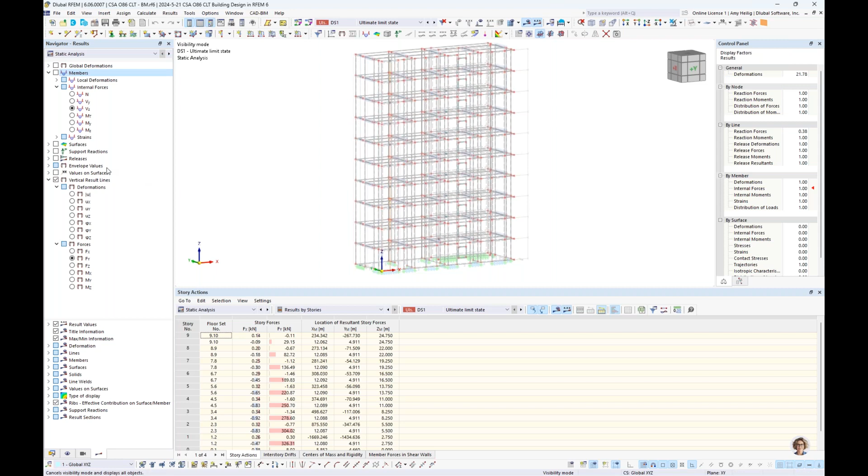So I'll go ahead and turn off the display of my members here and let us cancel out this visibility mode. We want to take advantage of what we call this vertical result line. So this is just going to show us, which we can see over here on the right-hand side for one of our load combinations, the total story shear graphically as we move up and down the structure. This is the same information given to us in table format as well.

We can also view the displacements of the structure, and as expected in the Y direction, we see higher displacement at the top of the structure versus the bottom. This is also given to us within table format as well as the inter-story drifts. And finally, we see here the center of mass and center of rigidity. So this information is shown in table format, but also we see the display here of the center of mass as we click down through these different stories.

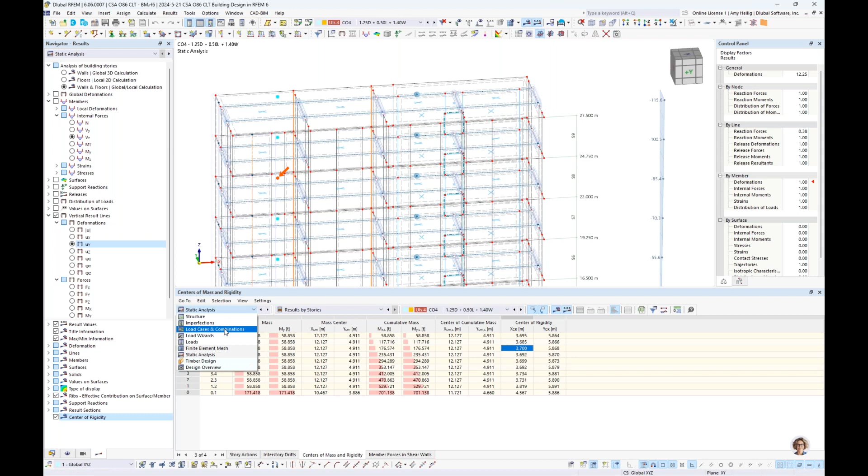We can also turn on the center of rigidity. So this is calculated with those rigid diaphragms and also presented to us graphically and in table format, so we can see how this varies compared to the center of mass. Now, no need to go into the details here because we are out of time, but under the timber design add-on, we are going to get the full design of these surfaces as well. Just like what we saw with example number 1, we're going to see the ultimate serviceability design ratios according to the CSA standard for both the timber floors and our vertical timber walls.

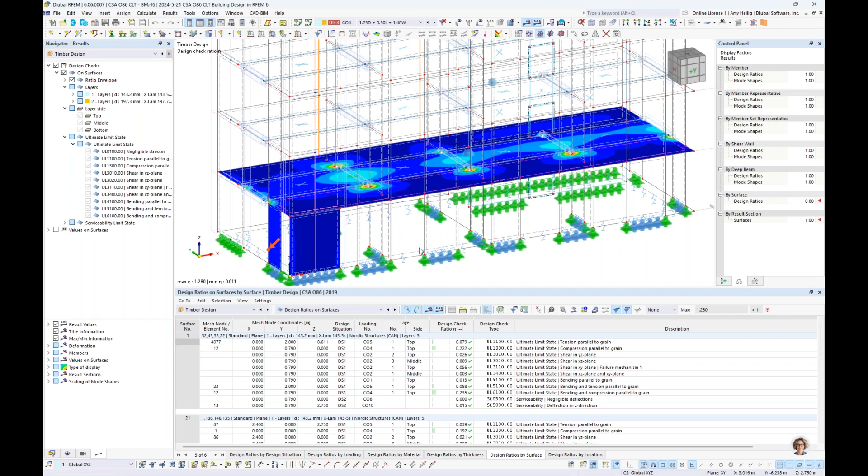Okay, so that will wrap up our second example today, where we have taken a look at both the gravity and the lateral analysis and design together for a multi-story mass timber structure.